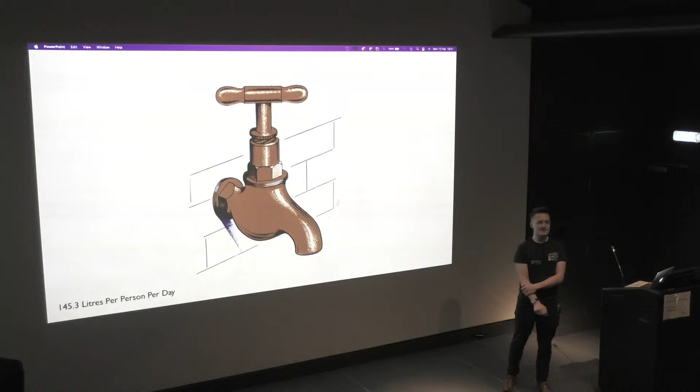Now, I'm a bit concerned by all the hands that went up, actually, with the next question I was going to ask. I was going to ask, how many of you can confidently say that you know where your drinking water comes from, the process it goes through, and how it gets to your home? Now, I can see somebody from a couple of the museums we're affiliated with, so I'm not going to ask them to answer that. But a show of hands of people who could confidently say that - so there's fewer hands have gone up there.

Now, it's interesting because every day, each and every one of us in this room consumes, on average, 145 litres of the stuff. Yet not all of us can say where it comes from. It's one of those mysteries - we only tend to question it when it goes wrong.

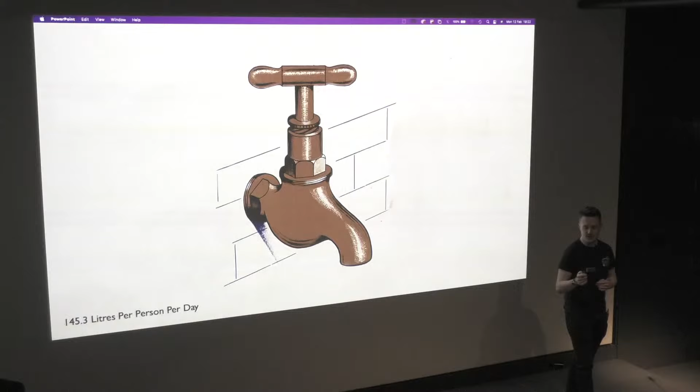So I'm hoping during this talk I'm going to tell you about how you receive your water before going on to the history of how the water supply system evolved. So for those of you who don't know how you get your water, this diagram along the top here and these photographs hopefully illustrate the system. So most of London's water comes from the River Thames.

The particular example I'm showing you on the screen is relevant to the very location we're standing in right now, because Kempton Park Pumping Station supplies water to central London. So the water coming out of the taps in this very museum has likely come from the museum I'm going to talk about in just a moment.

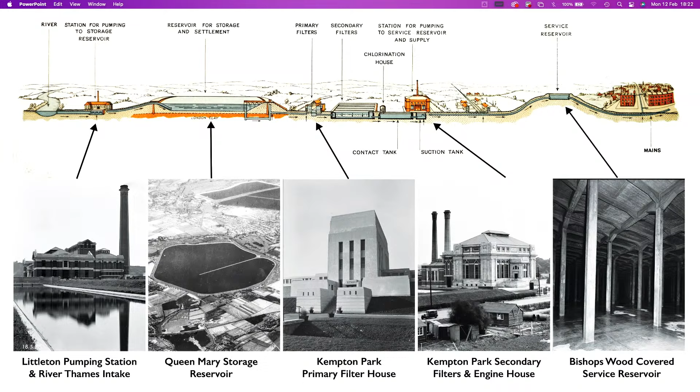Before I get going, this is how the system works. The water gets taken out of the River Thames in Staines or at Laleham. It then gets pumped into a large storage reservoir. The example is the Queen Mary Reservoir, which is so large you can fit the entire city of London inside it with a moat all the way around.

It's that big. When it was installed in 1925, it had enough water in it for the whole of London for 22 days. That number has gone down slightly over the decades because we now consume a lot more water per head than we were in the 1920s. But nevertheless, there's still a huge amount of water in there.

The storage reservoir does two things: it's the first stage of the settlement process for water, and it's also London's battery backup. So when we tend to have hosepipe bans in the summer months, that's because water authorities like Thames Water have been told to take no more water out of the River Thames. The level has fallen to a certain point, and we're totally reliant on what's been stored up during the rainy season.

From the reservoir, the water then flows to the treatment works, and I'm going to talk about Kempton Park this evening. It goes into the primary filter house at Kempton, where the coarse bacteria are filtered out of the system. It then passes into the slow sand filter beds, which I'll talk about a bit later, before going into the pumping station for distribution into the water mains that run all across London to high level ground in the north of London on hilly ground. The example given here is Bishop's Wood covered reservoir.

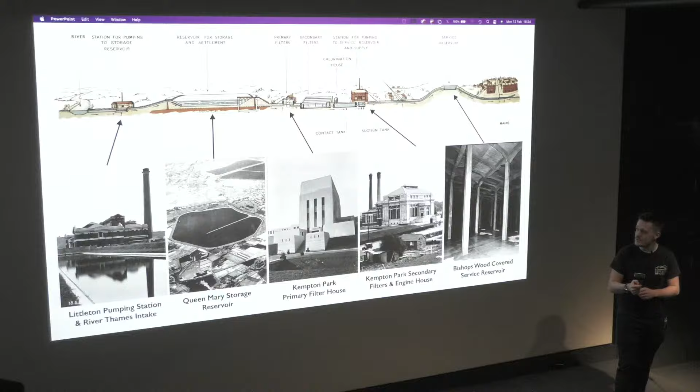So hopefully you now know where you get your drinking water from. And it's very good to be here this evening, because this is where Kempton Park actually supplies its water to. So for those of you who haven't been to Kempton Park Pumping Station or Kempton Steam Museum...

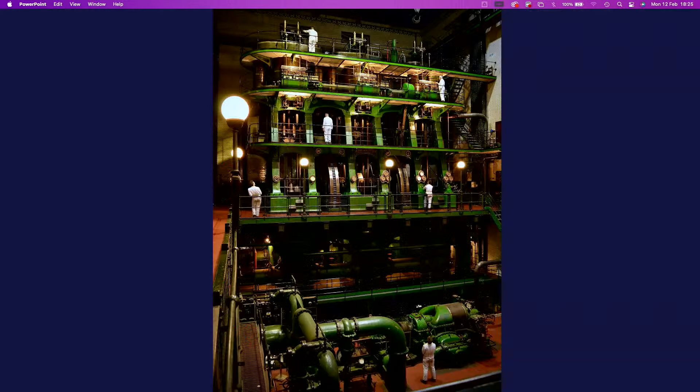Inside the building are two of the largest steam engines of their type in the world. In fact, we do say that's probably the largest working steam engine in the world, though we can't actually prove it because it's very difficult to measure the sizes of steam engines, as they vary considerably. But I think it's probably a contender.

That engine is called the Sir William Prescott steam engine. It was installed in 1928, and it pumped London's drinking water from 1929 right through until 1980, when it was decommissioned. If you can make out the figures in white, they are people - that guy there is about 6'2", which gives you a sense of the engine's height from base to top: 62 feet. It weighs about 800 tons.

It's very similar in size and design to the engines that were on board the Titanic. So in fact, we get a lot of film crews in there pretending that's the Titanic's engine. And we joke that this engine's probably run more as the Titanic's engine than the Titanic's own engines ran as themselves.

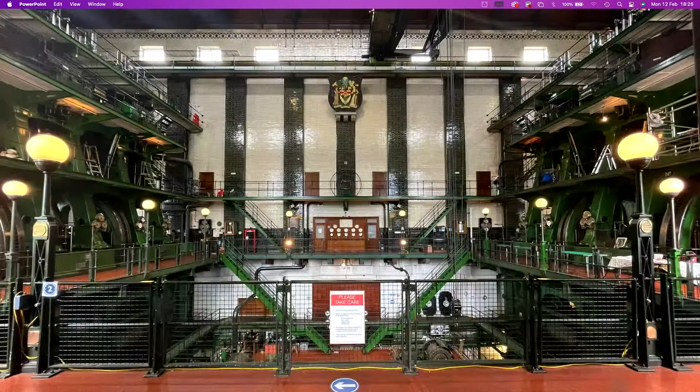And of course, that engine isn't on its own in there. There are two engines. The engine I just showed you is this one on the left, the one opposite being the Lady Bessie Prescott engine. Sir William and Lady Bessie, they're husband and wife. Sir William was the chairman of the Metropolitan Water Board, and I'll talk a bit about that organisation later.

But originally all the pumping operations went on inside this building. Where our museum now is, that's the new kid on the block, and in fact it remains the newest building on the site, yet it has the oldest equipment inside it.

So in its heyday, it supplied about 14% of London's water. So about 1 in 7 people in London relied every day on the works for their drinking water. It pumped about 50 million gallons of water per day. London consumed 300 million in those days.

The distribution included the West End, the East End, the City of London, and a lot of the industrial areas of west London, including Western Avenue, the Great West Road, and the Guinness Brewery at Park Royal. So if you were ever drinking a pint of Guinness from the Park Royal Brewery in the 60s or 70s, you were drinking water that potentially came from Kempton Park Pumping Station. I thought I'd add that one in as well. You might be familiar with that one.

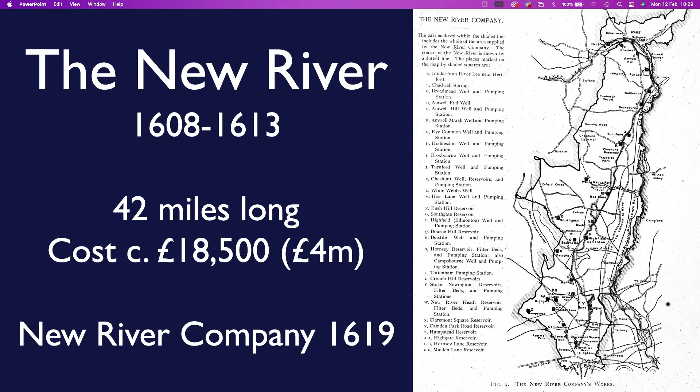So he built the new river, 42 miles long, carrying the water all the way from Hertfordshire, near Amwell, all the way down into Clerkenwell. Now, it's amazing to think that when it started in 1608, this entire project was only completed 5 years later. And it cost £18,000, which, if you account for inflation, is now £4 million in today's money.

And once it started operating, the New River Company was established to maintain it and to supply the water that was being brought down from Hertfordshire. The New River Company was one of the 8 private water companies that would operate over the next 300 years, supplying London with its drinking water.

This is where the new river begins now. This place is called New Gauge, and this is where the new river taps into the River Lee in Hertfordshire. Now, originally, the water actually came from a spring called Chadwell Spring, near Amwell. But they decided that wasn't quite enough to supply the new river, so they tapped into the River Lee to supplement the supply. But this is where the new river originally started.

And if you go to Amwell, there is a monument to Sir Hugh Middleton in the middle of the river. This is the monument here, shown in 1952, looking rather smart, but it's looking a bit tired now. Engraved on the side in Latin, I won't read it in Latin, it says, 'An immortal work, since men cannot more nearly imitate the deity than in bestowing health.'

Sir Hugh Middleton brought clean water to London, and of course, that's what we rely on for survival. This is the New River as it weaves its way down towards London. You can see along the route there are little pumping stations that take water out of wells underground and pump it into the river, which is a gravity flow all the way into London. If you get the opportunity to walk along the New River Path, I can recommend it. It's a beautiful walk.

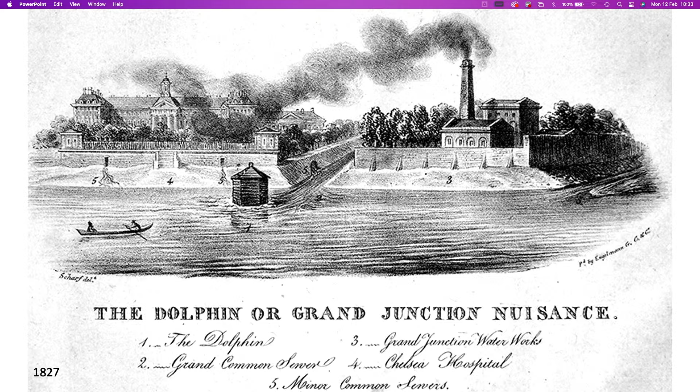This pamphlet was published in 1827, called The Dolphin, or the Grand Junction Nuisance. The Grand Junction Waterworks Company was one of the 8 private water companies that supplied London with its drinking water. This is their waterworks at Chelsea, and that there is their intake in the River Thames. They just sucked the water straight out of the Thames in Chelsea and then pumped it into the pipes without filtering it.

That there is a sewer, and that is the Chelsea Hospital. So the sewage is pouring out into the River Thames and wrapping itself around their intake, and then they're sucking it back in and pumping it back into your home again. It was a completely closed loop. People thought that perhaps that's not a good idea, and that might explain why a lot of people were getting unwell when drinking Grand Junction water.

So in 1829, this guy came along, James Simpson, and we think of him as the modern-day Middleton, Sir Hugh Middleton, because he was the first engineer to implement the slow sand filter bed at a waterworks in London. Prior to him coming along, all of the waterworks companies used to just suck the water out of the Thames, like they did at the Dolphin, and put it straight into supply.

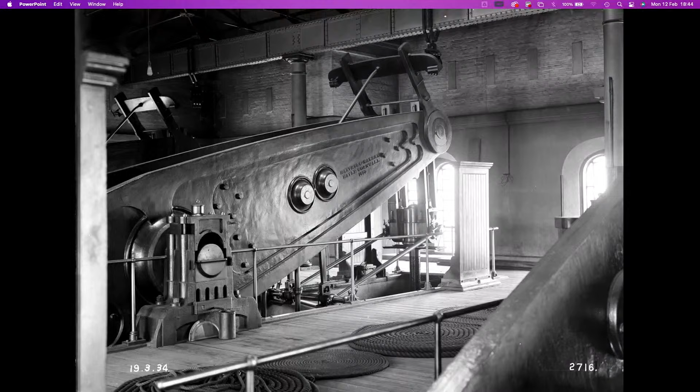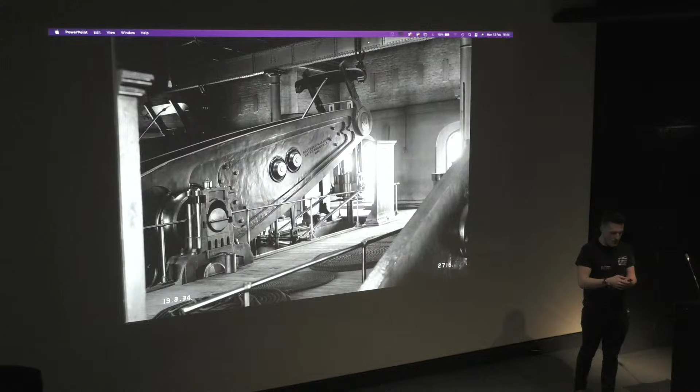And these are the beautiful beam engines that were installed in that pumping station for supplying the East End of London with its drinking water. These engines, 3 of them were in there. They would suck the water in from the filters outside the building and then put the water into a 36-inch water main that ran 19 miles all the way over to Finsbury Park Reservoir.

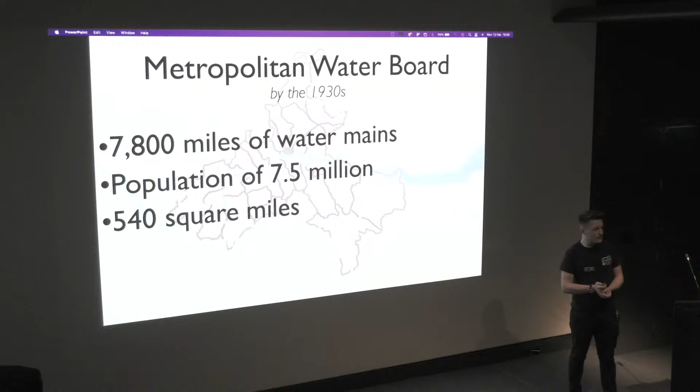If you're going down the Portsmouth Road, you can see some of the remnants of those filter beds. And one of the largest reservoirs in London, the Queen Mary, which you may recall at the very beginning of the talk, I showed you the process of how water gets from the river to the tap. That's the reservoir you could build the entire city of London inside, and it supplies Kempton Park Works with water from the River Thames.

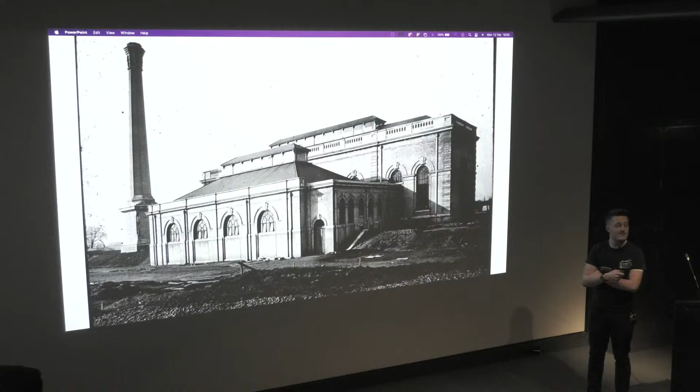The land here was bought by the New River Company in the 1890s, but by the time they started to actually dig out the ground, the Metropolitan Water Board had come into being, and they finished all of the works. So the waterworks never functioned under the New River Company, it was only ever under the Metropolitan Water Board.

Inside that building, they installed 5 Lilleshall triple expansion steam engines in a row, which must have been quite a sight to see, to walk in and see these 5 engines in a row, all pumping away.

They built a pipeline which carries the water all the way from Kempton, up through Feltham, Hounslow, Heston, Hanwell, Greenford, Willesden, all the way to a reservoir at Cricklewood, where the water was then boosted at Cricklewood Pumping Station up to a reservoir at Fortis Green.

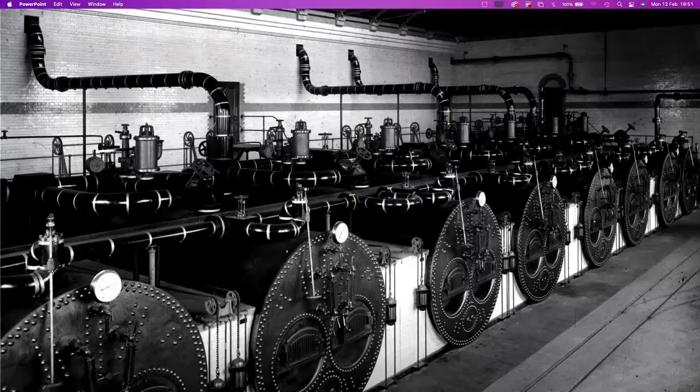These are the 8 Lancashire boilers that were put in to provide steam for those steam engines I just showed you. In order to feed those boilers with coal, they built their own narrow gauge railway line to bring coal from a wharf on the River Thames at Hampton to the works at Kempton.

They then relied upon a standard gauge railway line bringing the coal in from the Shepperton branch of the South Western line.

So this is where the museum starts to come into the story. In the 1920s, as many of you may be aware, after the First World War, London started to expand rapidly further and further into the countryside. And of course, with more and more people living in London, they needed more water.

So the Kempton Park Works was decided that it wasn't fit for use, even though it was only 10 years old by this point. They needed more water. So just before the First World War, they decided they were going to expand the pumping station and put in a new waterworks there. But the war got in the way and delayed plans. In the 1920s, the plans got pulled out of the drawers again, and they decided to build the new engine house where our museum now is.

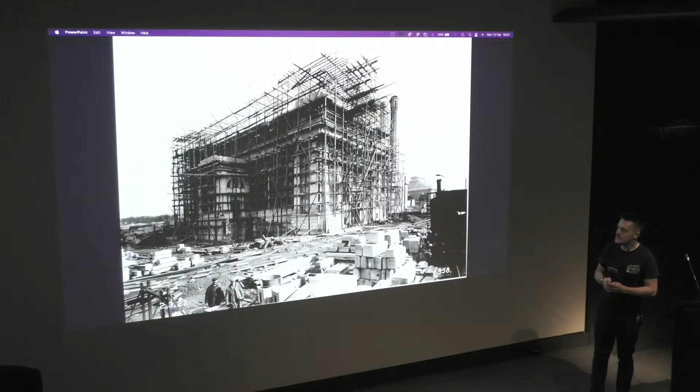This photograph shows it being constructed in 1927.

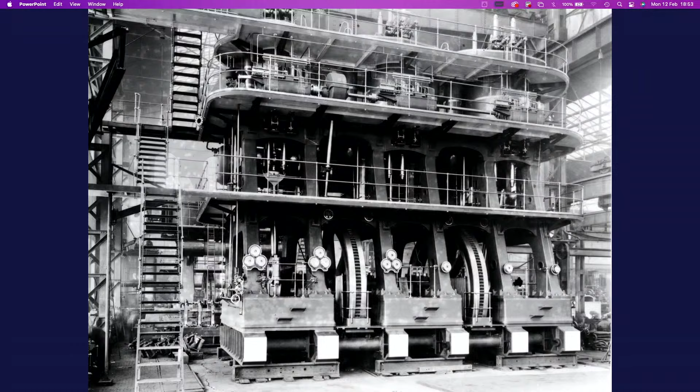In order to pump the vast volume of water that London required, they put in some of the largest, or the largest, steam engines ever built in this country. This photograph shows one of our two triple expansion engines that we now preserve at the museum, on blocks in the factory where they were built. They were made by Worthington Simpson in Newark-on-Trent.

The factory was not big enough to actually house the complete engines and pump units, so you can see that's the top of the engine.

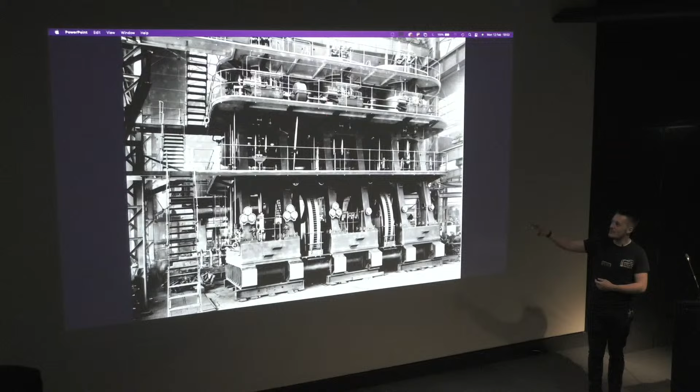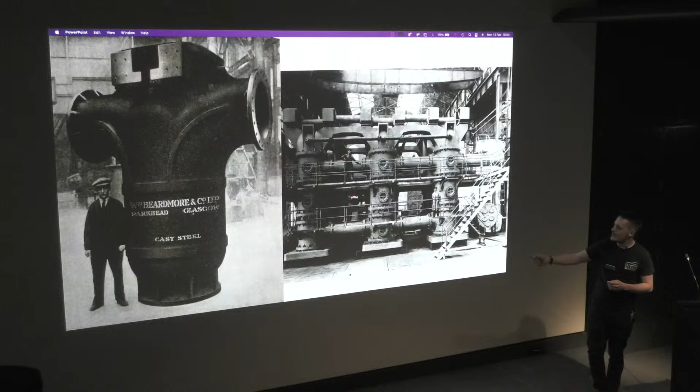This photograph shows the pump units in a different part of the building because they simply did not have the height in the erecting shop to put them both together. All of the design work, the castings and the machining was done by Worthington Simpson in Newark, but the steel forgings and cast steel components were made by William Beardmore and Co. in Glasgow. This photo on the left shows one of the pump chambers as it's just come out of the forge, with a worker standing next to it to give you a sense of the scale of these machines. So for any of you who've not been there, these engines are pretty big.

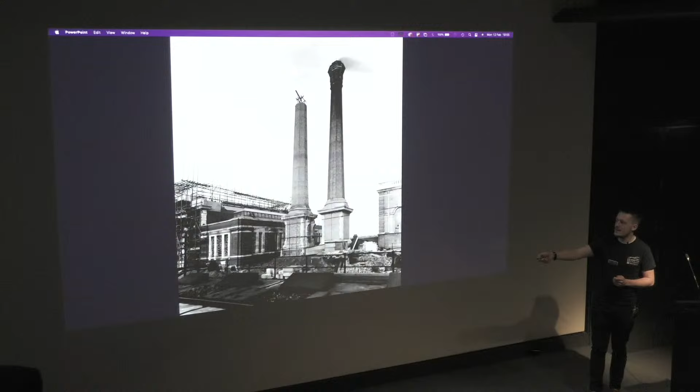They also added an extra chimney. If any of you noticed the earlier picture I showed you of the first pumping station at Kempton, it had just one chimney, but they put a second chimney in to accommodate the flue gases from the extra bank of steam boilers that they put in the building that butts onto the back of our museum.

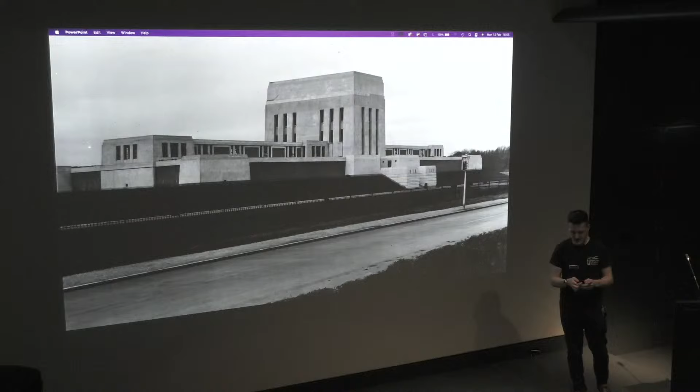This building is still fully active to this day. I went in there a few weeks ago with Thames Water to look at what was surviving from the 1920s. Almost everything from the 1920s is still in operation to this very day, except that the brass isn't kept as well polished as it was 80 years ago.

This image shows the engine house just after it had been completed and the scaffolding removed. You can see the absolute chaos outside where they're still laying all the water mains and finishing it all off, but I think it's quite an impressive photograph to look at.

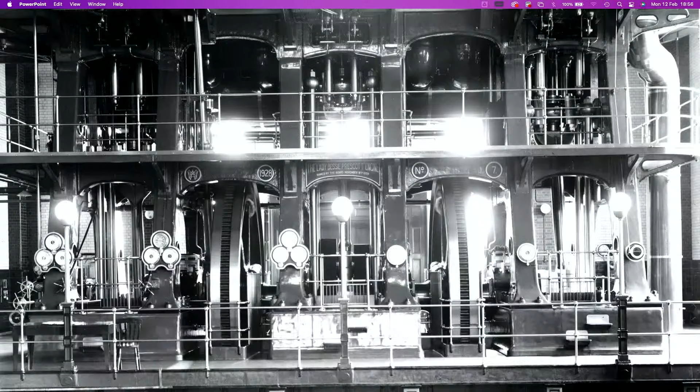This is an image showing one of the two triple expansion engines just after it had been finished, when they were still shiny and new. This is the Lady Bessie Prescott engine. Out of the two engines we have in the museum, one we can run, the Sir William Prescott engine, but the Lady Bessie Prescott engine is currently undergoing restoration. Hopefully one day it may even look as shiny and nice as it does in that photograph.

Because this was such a massive undertaking, the Metropolitan Water Board thought they'd throw a party when they opened the place in 1929. The chairman, Sir William Prescott, who our engine is named after, had contacted the King and asked whether he could come along and open it up, as it was quite a proud moment for the board. The King and Queen had, five years previously, opened the Queen Mary Reservoir.

Unfortunately, the King was ill at the time, and we've actually been through the records, and it's quite amusing because Sir William Prescott starts working his way down the rank of the royal family. He then asks if the Prince of Wales could come, but later King Edward VIII was busy covering for the King. He then asked the Duke and Duchess of York, later King George VI and the Queen Mother, but they were covering for the Prince of Wales.

So in the end he says, OK, what about the Minister of Health? So an invitation goes to Neville Chamberlain. But between the invitation going out and the inauguration in October 1929, there is a general election, and the Conservatives are ousted, and the Labour Party come in for only the second time in history.

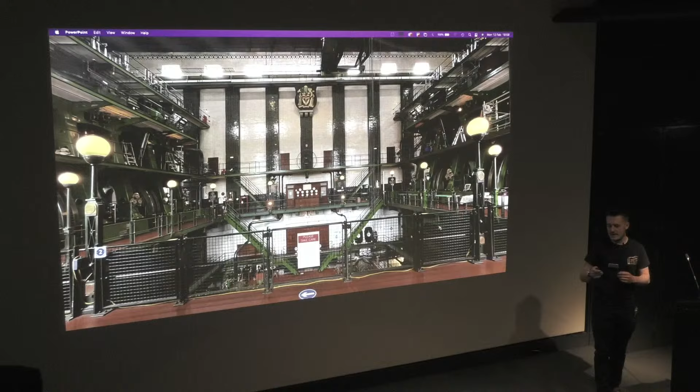Now this day is a significant day in world history because it's the 24th of October, 1929. I don't know if that means anything to anybody in this room. I'll give you a clue—it was a Thursday. I can hear crash being mentioned. You're right, it's Black Thursday—it's the first day of the Wall Street crash.

But of course nobody in there would know, because this is 11 o'clock in the morning. The stock markets in New York don't open until about 1 or 2 o'clock UK time. So I think of that day as being a sort of pivotal moment in world history.

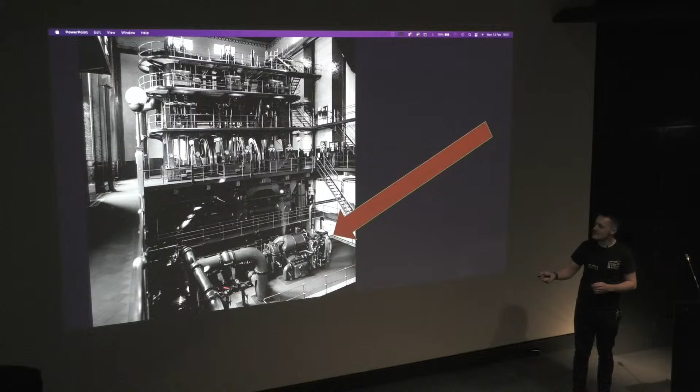And this is one of them here. The other one's just out of view, but you may be able to see it here—here's the other unit running at some point in the 1960s. Very noisy things, less efficient. They burned about 10 tonnes more coal a week when they were running a steam turbine. Very noisy, gave lots of the engine crews tinnitus.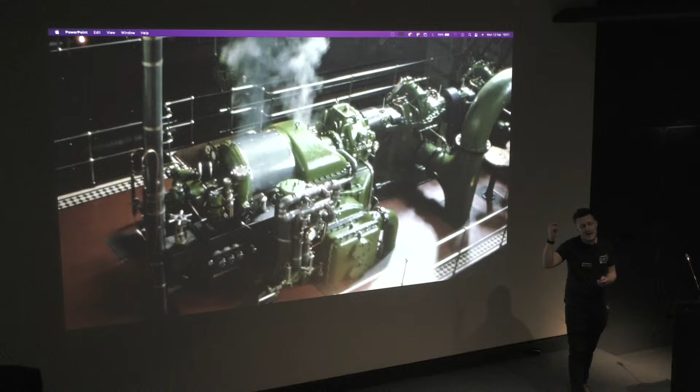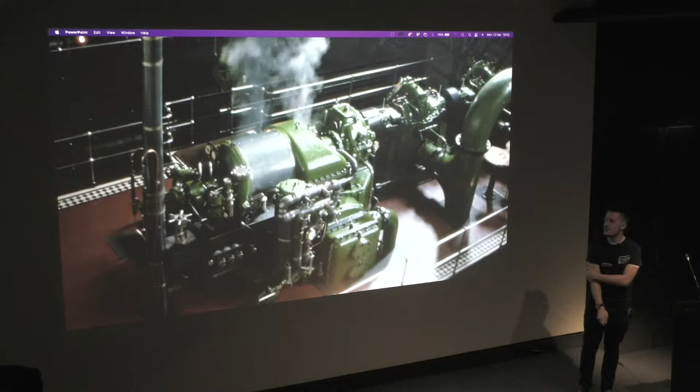But they had exactly the same horsepower, 1,008 horsepower, as the big steam engines, and in fact they could pump slightly more water. The big triple expansion engines could shift about 19 million gallons of water every day, but the turbines could move about 24 million gallons per day. So even though they used more energy and more coal and were noisier, they were slightly more useful.

When the place was shut down in 1980, they had no use for the engine house and boiler house, so Thames Water just left it alone. But sadly, in the 1990s, they did find a use for the boiler house and the boilers were scrapped. I'll come back to that a bit later.

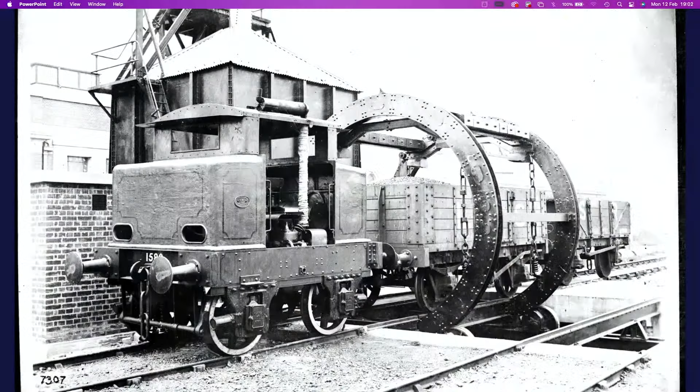I mentioned that there was a little narrow gauge railway line to bring in the coal, but there was also a standard gauge railway line. This photo shows a Planet locomotive hauling coal wagons along this line, which was just opposite the boiler house and the museum building - you might just see that's the back of the museum building there. If you're in the museum and look just over the road, there is an embankment, and that's where the railway line was located.

Coal trains would come down the Shepperton branch of the Southern Railway line, and the coal wagons would be hauled along to this wagon tippler, and they'd be flipped upside down. The coal would then drop into a chute underneath the railway lines, through a tunnel under the road, and be carried into the boiler house through a bucket system into the roof, then slide down these slides into the boilers, which had a moving chain grate that would carry the coal through the furnace. As the coal went through the furnace, it would burn and be turned to ash. Once it was ash, it would then go over the edge of the chain grate into the hoppers, then back out to the railway line and be carted off.

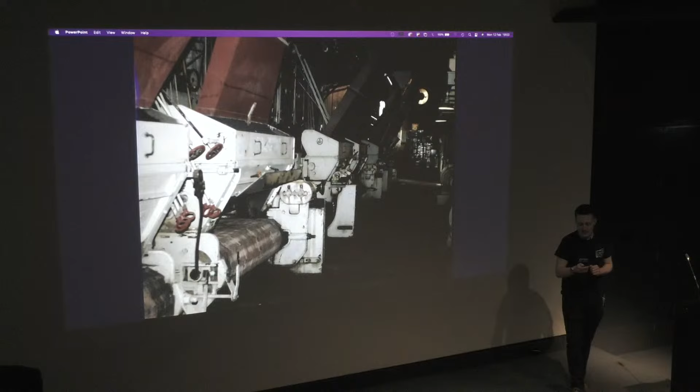So it meant that if you wanted to increase the amount of steam for the machines, you just had to turn the electric motor speed up. It was a very efficient and not labour-intensive way of doing things.

One of the pivotal moments in the history of the waterworks was during the Second World War, because they identified that the Kempton Waterworks was of great importance for supplying water for London, not just for drinking and for industry, but also for firefighting.

We didn't have the luxury in the 1940s of having bottled water in ample supply. If the water supply had become contaminated or switched off, there wouldn't have been enough water in reserve for everybody. The government actually feared that there'd be a refugee crisis where everybody would try and leave London to go into the home counties, and they just wouldn't be able to support everybody.

So Kempton Park was earmarked by the government as being the most important pumping station in London, and it must be protected at all costs. This is a quote from the chief engineer and the ARP officer at the time.

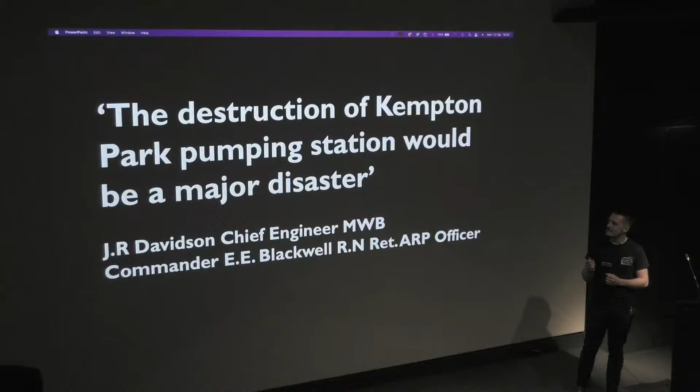They put anti-aircraft gunners in the grounds and had their own battalion of the Home Guard there. They put barbed wire everywhere. There was even talk about putting steam jets on the gates to blast steam to any intruders should they come in, which I think is a bit extreme myself. But there's all sorts of talks about the things that they did in the plan.

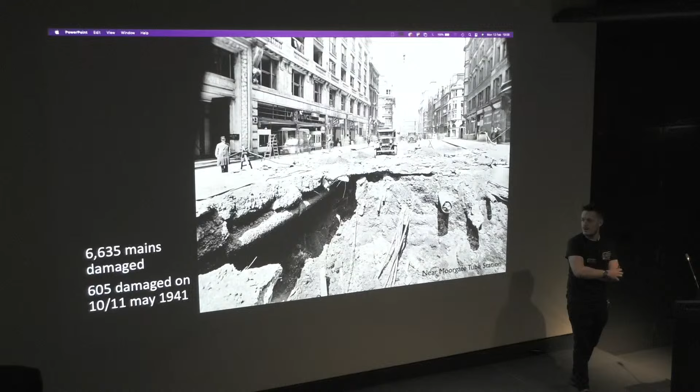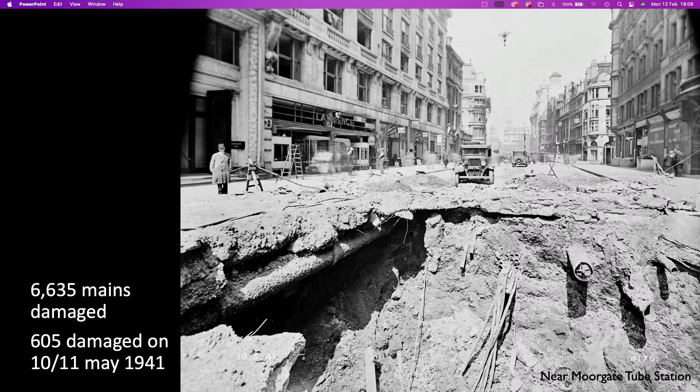But I looked at the records, and almost all of them were repaired and functioning again within 2 weeks, which I think is an amazing achievement. During the course of the war, they lost 6,635 water mains through enemy action.

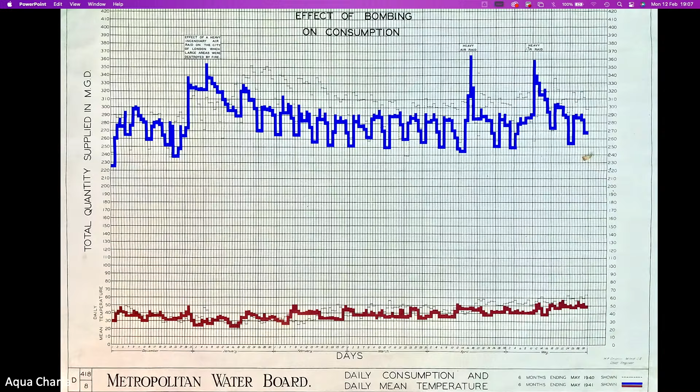This diagram here shows the effect on water consumption during the Second World War. You might notice these spikes here are the 3 worst nights of the Blitz, and it shows that on some nights London went through an extra 100 million gallons of water in one night, either to put out the fires or through leaks from the water mains being ruptured underground. That night there, the 29th of December 1940, is the night famously depicted on the front of, I think, the Daily Mail, with St Paul's Cathedral surrounded by smoke and fire. They all tally with nights when it was a full moon and the River Thames was at its lowest level. The firefighters weren't able to rely upon suction of water from the river because it was too low to do it, so they had to use the mains water if they could, hence why so much was consumed.

Now, in order to protect Kempton from air attack, the chief engineer wanted to have barrage balloons. These are quotes from the archive records. He wanted barrage balloons put up because he feared enemy aircraft might target the pumping station. But the RAF wouldn't have any of it. They said no, it will interfere with our own aircraft trying to fly into Hanworth Aerodrome, Heathrow and Brooklands, and anyway, don't worry, we don't think the Luftwaffe are going to target any of your waterworks. He went on to say they can't be seen very easily from the air. There is another letter, which I've not included, from the chief engineer saying, you're wrong, they're all surrounded by massive bodies of reflective water, they've all got chimneys, they stick up like a sore thumb, please reconsider. But Squadron Leader Slightfoot was having none of it, and he said no.

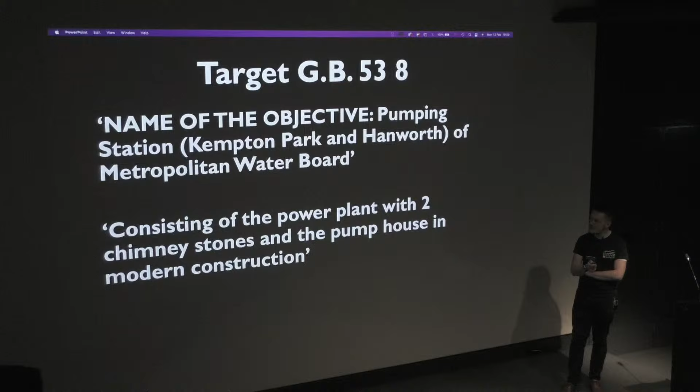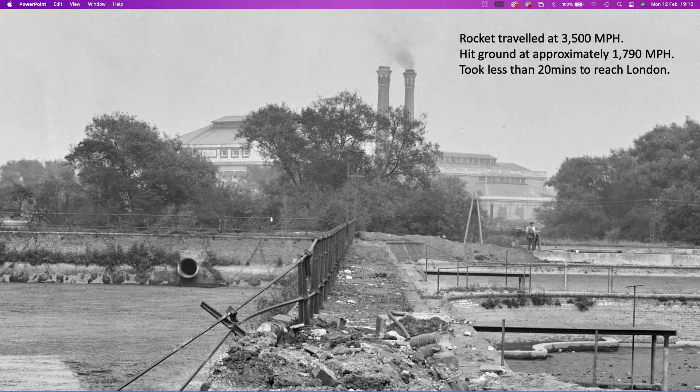Now, fortunately, it didn't get hit, but it did come very close. This photo here shows the damage caused by a V2 rocket, which landed just across the road from the pumping station, in the old East London Waterworks, and put a rather large crater in the middle of the filter beds. We do have stories of other bombs falling in the vicinity of the works. In fact, one was found in the 1980s in the reservoirs by a fisherman who was over there fishing. It was a dry summer, and apparently the water level had fallen down to the silt level, and he could just see what looked like the tail fins of a bomb sticking out of the mud.

And he called the manager. The manager got onto an area manager, and the area manager told me the story. He went down there, got his binoculars out, looked across the reservoir, and he could see the tail fins of a bomb. But he noticed there were footprints going out and footprints coming back. So he turned around to the filter bed labourers and said, has one of you been out there to that bomb? And this guy went, oh yeah, I went out there. He said, it's got a little propeller on the back, but it won't spin round. And apparently they got the bomb and took it away and blew it up somewhere else.

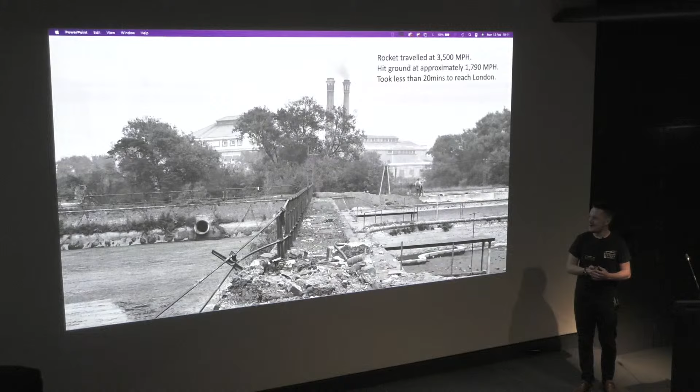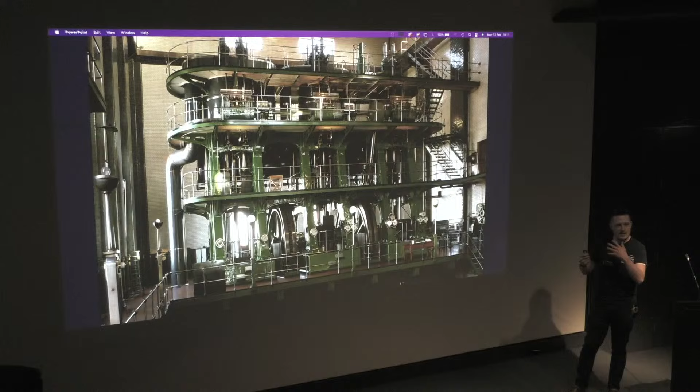So post-war, the place carried on serving its purpose, pumping London's drinking water. This is one of the photographs showing how pristine the place was kept right up until the day it closed. You can see your face in pretty much every single surface of the engine. And it had some fame.

If any of you have ever seen Chitty Chitty Bang Bang, it played the part of Scrumptious' Sweet Factory. There's a scene where Caractacus Potts rides up on his bike with the kids. They go into the building on the right, and then you see all the dogs jumping in and out of the windows. I've watched the film several times and confirmed they are jumping in and out of the windows of the waterworks. And I mentioned earlier that a lot of Titanic films get made there as well, because we have engines that are very similar to Titanic's.

In the 1970s, the Metropolitan Water Board ceased to exist. Thames Water Authority came into power, and they amalgamated the sewer waste system and the water supply system into one organisation.

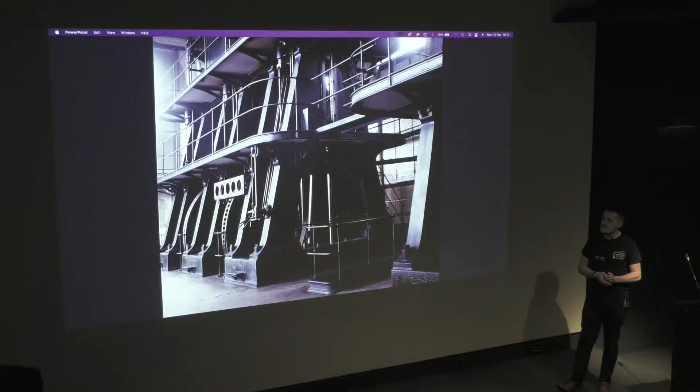By the 1970s, the old Lilleshall pumping engines in the building behind our museum were getting on a bit. So Thames Water scrapped them and replaced those engines with five electric spindle pumps, and they started commissioning those in the late 1970s.

Now, fortunately, they didn't need the building, so the engines survived, and even in the 1980s they were saying, well, they might be of interest in a few years' time. It would cost a lot to get rid of them. We'll just leave them. And likewise, they left the boiler plant.

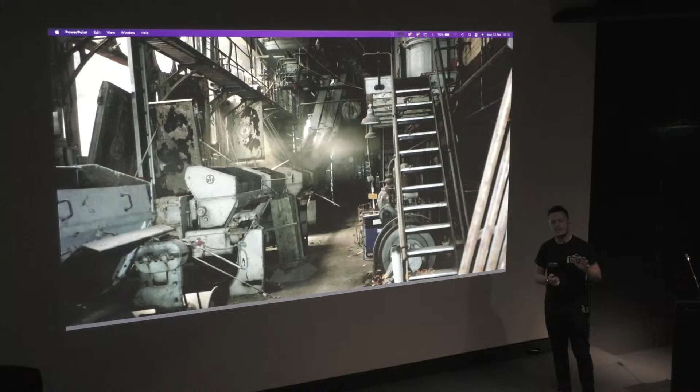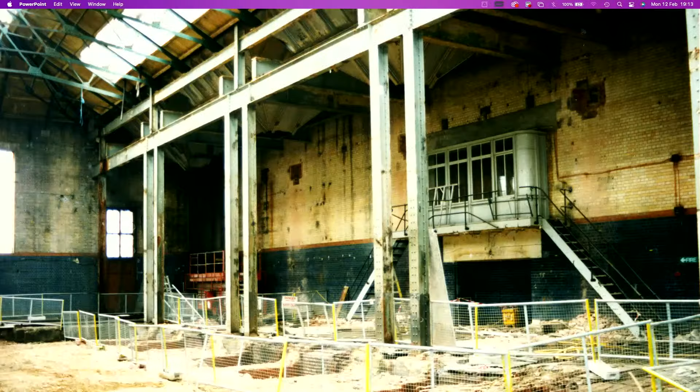But by 1993, Thames Water had decided that the boiler plant was taking up a lot of room and that they wanted to put some extra equipment in there. So sadly, they scrapped all of the original coal-fired boilers in the 1990s. And these photographs here show the building being hollowed out to a complete shell.

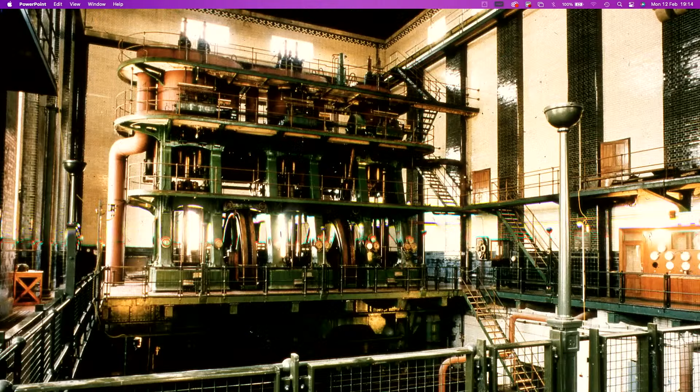By the 1990s, after they'd removed the boilers, the engines were looking a bit tired. I showed you how beautiful they were looking in the earlier photograph. This is what they were looking like by 1995 - rusty, covered in dirt, the pigeons had got in, the windows had been blown out. It was all looking a bit sorry for itself. And this is the engine just a few years later, and you can see the flywheels have rusted over, the paint's flaking off, the glass on the lamp standards had been smashed. It was all looking rather sad.

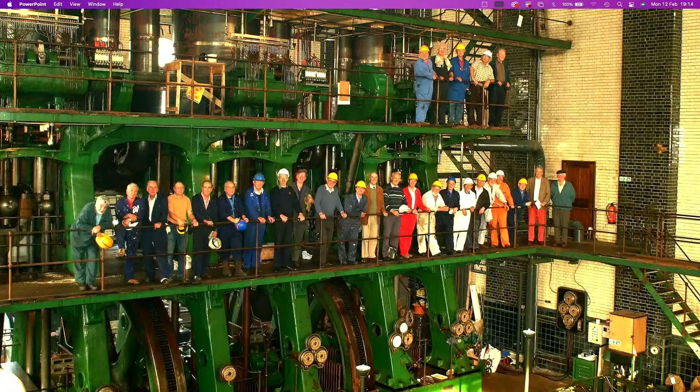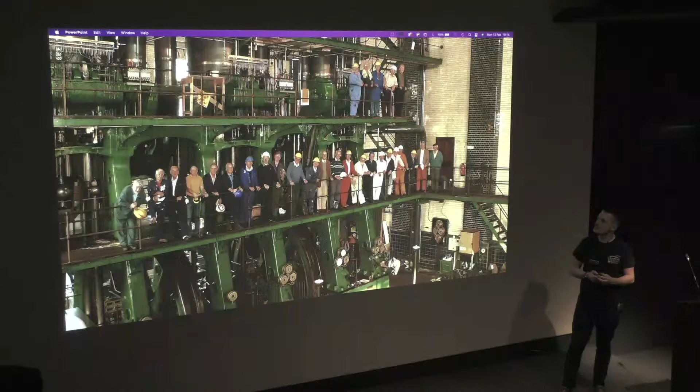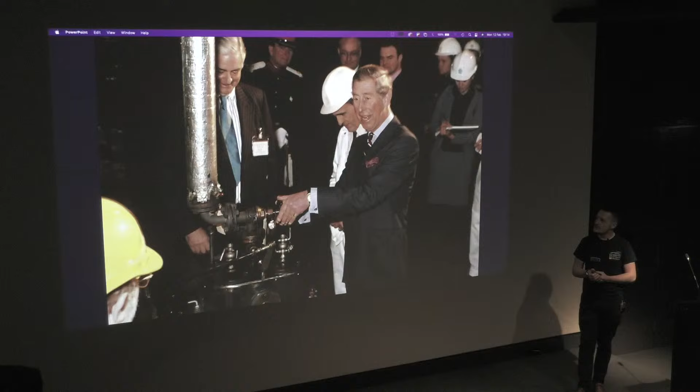So fortunately, in 1997, Thames Water gave the Kempton Great Engines Trust, who I'm a trustee of, a 99-year lease to look after the engines, the building, get the engines running again, and to tell the story of London's water supply. This photo shows some of the volunteers in the early 2000s on top of the Sir William Prescott engine. And in 2002, we asked this chap to come along and get the engine started. You may recognise him. He came along, and where Sir William Prescott had failed to get the King in the 1920s, we succeeded 20 years ago to get the Prince of Wales, and now King Charles, to start the Sir William Prescott engine.

The building has been open to the public now for 20 years, as of March this year. Now, I mentioned that the boiler house was gutted in the 1990s. One of our big projects going forward as a museum is to try and see if we can get this building back, because it butts onto the back of the engine house. It's part of the same building. All they've done is bricked up the doorways that link the two together.

Now, the equipment that Thames Water put in there in 1993, they have since stopped using. It's sitting there redundant, decaying. So we've put it to Thames that we'd quite like to remove the modern equipment they put in there, get the space back, and then we can increase our museum facilities, put in a lecture hall just like this one, funnily enough, exactly what we're envisaging, improving all of our facilities.

We have got an artist's impression here of something that we'd possibly like to do in there. So we thought about trying to rescue another steam engine from the New River - that's the Turnford engine on the New River up in Hertfordshire. And trying to just increase the space that we have available, because at the moment we've got the beautiful engine house, but that's all we have. We're trying to cram all our facilities into this one space. So we're thinking that'd be quite a nice opportunity for us going forward. Stay tuned to that project.

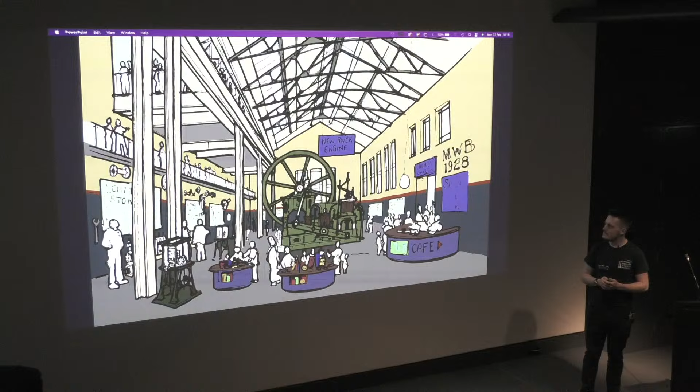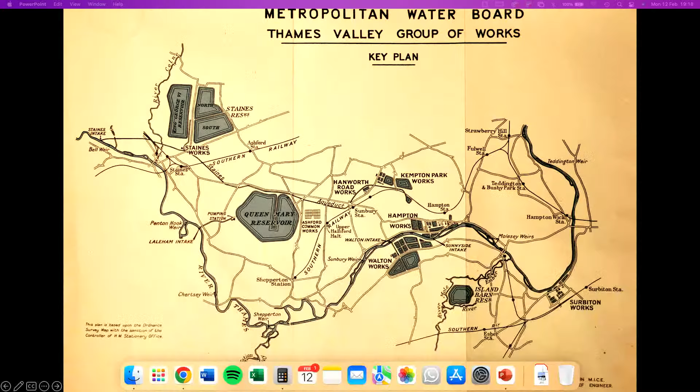But there's also a pumping works at Hampton. Let me find it - so this chart here shows all of the waterworks in the area. Hampton is in the middle here. That's a still fully active waterworks, as is Kempton Park, except what's in our museum building, and that supplies a lot of the west of London. I live in Twickenham, so that supplies the drinking water for where I live. In fact, if any of you live in that area of London, you lost your drinking water on Christmas Day 2016 - you were getting your water from Hampton Waterworks because apparently there was a power failure and the pumps went off. That's why we didn't have any water.

And can the different waterworks provide backup for each other? They can - there's intercommunication between them. So Kempton can pump water for Hampton, and likewise Hampton can do Kempton. And Ashford Common Works, which is just next to the Queen Mary Reservoir, also has interconnections. During 2020, because of the COVID pandemic, central London was so empty of people that Kempton Park Works didn't have a lot of demand, and they shut it down for 6 months, which was the first time in its history it was taken offline.

And what little water was needed in central London, just to keep perhaps Trafalgar Square fountains ticking over, all came from Ashford Common Works. But it was really quite eerie because the whole works went silent for 6 months, and the engineers said they'd never seen anything like it. It was only because of the pandemic that they were able to do that in its 100-year life.

You mentioned Kew Bridge Works - now that's purely a museum now? That's purely a museum. So when the Grand Junction Waterworks had to move their intake from Chelsea, from the Dolphin, they moved to Kew Bridge. And then they carried on doing exactly the same thing they did at Chelsea - they just sucked the water out of the River Thames at Kew and put it straight into the water supply system. But after the Act of Parliament came along requiring them to filter it, they built the works at Hampton, pumped the water from the River Thames at Hampton to Kew Bridge, then filtered it at Kew Bridge and put it into supply.

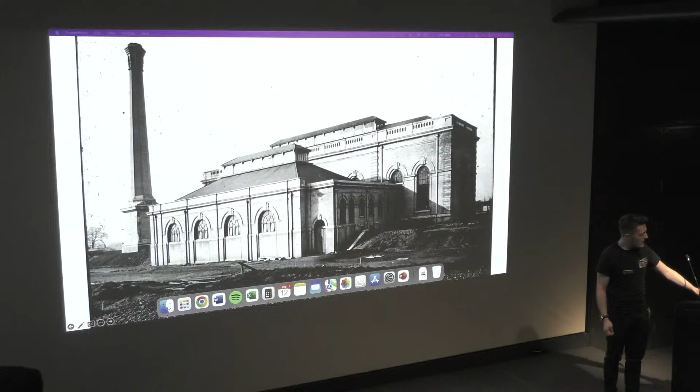The tower at Hanworth Road, though, was a dual - let me try and find it - it served a dual purpose. It was a chimney and a standpipe tower combined, broken into thirds. There was an empty shaft that did nothing, there was a chimney shaft - you can see the opening at the top there - and then there was another section that had the iron pipe that rose up, and then the iron pipe that came back down again.

The one at Brentford, at Kew Bridge, is purely a standpipe tower. They had a separate chimney, which is depicted in this picture here - you can see the little chimney at the back and then the standpipe tower at the front. Only the standpipe tower now survives at Kew Bridge. But the idea is that the head pressure the pumps have to deliver the water at is always the same, because the tower never gets higher or lower. So even if demand increases, it doesn't suddenly make the engines speed up and hit the blocks and break themselves.

Can you tell me what they do with the sand? They clean it. What they do is skim the top layer of sand off about once a month, and take it to the cleaning facility on site, where they clean it with clean water. It's a very circular process - they let it settle, skim off the sludge that comes to the surface, which gets taken off to be treated elsewhere, and then the sand gets reapplied. I don't know how much sand they eventually get through, since some probably gets lost in the process, but it does get cleaned.